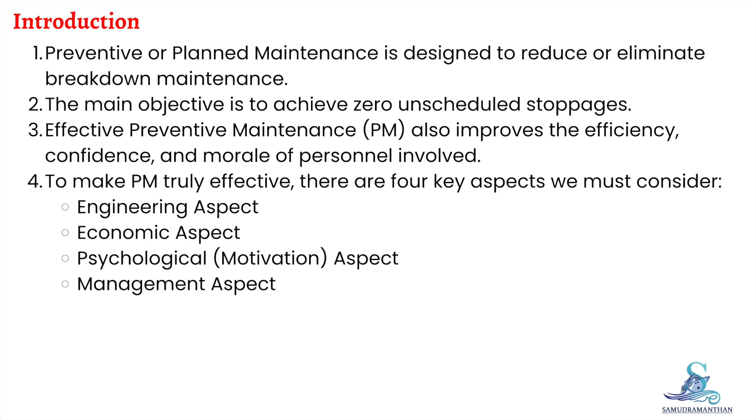To correctly implement and continuously improve preventive maintenance, often referred to as PM, there are four major aspects that must be considered. These are engineering, economic, psychological or motivational, and management. These aspects are essential if our aim is to have zero incidents and zero breakdowns. Let's understand each of these in detail.

The engineering aspect is all about performing the right task with the right technique at the right frequency and using the right tools. Here, the component and the system must always be viewed in totality, meaning we must see how each part interacts with the others. This holistic view helps in avoiding overlooked weak or vulnerable points in the system.

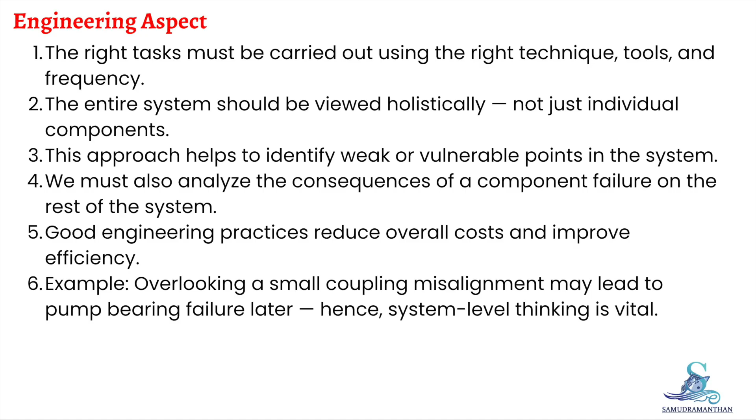It is also important to analyze the consequential effect of any component or system failure because one small defect can sometimes lead to a major breakdown. In short, good engineering practices always help reduce costs and lead to efficient performance of tasks, forming the technical backbone of a successful maintenance strategy.

The second one is the economic aspect. Here, we must understand that maintenance must always be worth the effort. Unless the issue is critical, such as one leading to downtime, environmental impact, or a safety concern, the procedures adopted should be economically justified. We must always compare the value of the potential failure with the cost of the maintenance effort. Spending more to maintain a system that is worthless is simply not practical.

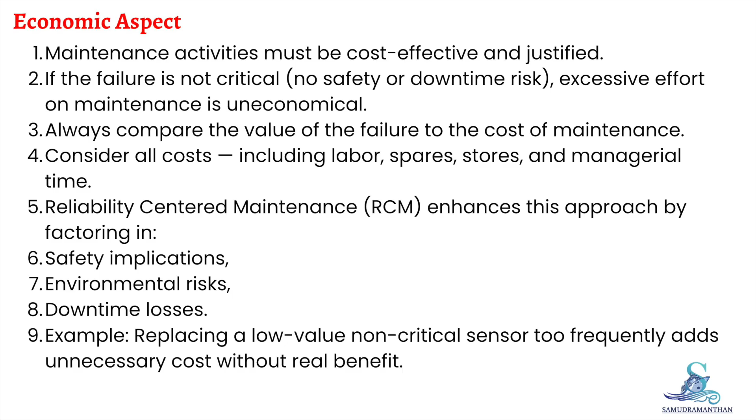Therefore, while calculating the cost of maintenance, we must include all related factors: executive time, labor cost, spares and stores, and other logistics. The concept of reliability centered maintenance or RCM adds greater depth to this economic approach as it incorporates safety, environmental impact, and downtime into the economic evaluation.

The third important aspect is the psychological or motivational aspect. The effectiveness of a planned or preventive maintenance system depends largely on the people involved: the seafarers, superintendents, and managers. All of them must be properly motivated so that the jobs are carried out as per plan and schedule. Personnel must be well trained and made aware of the importance of the PM system.

They should feel that they are an important part of the maintenance system, not just executing tasks mechanically. A sense of team spirit and ownership is crucial. When the personnel on board are fully aware of the system's goal and understand how the maintenance program benefits them and the vessel, they perform with more dedication.

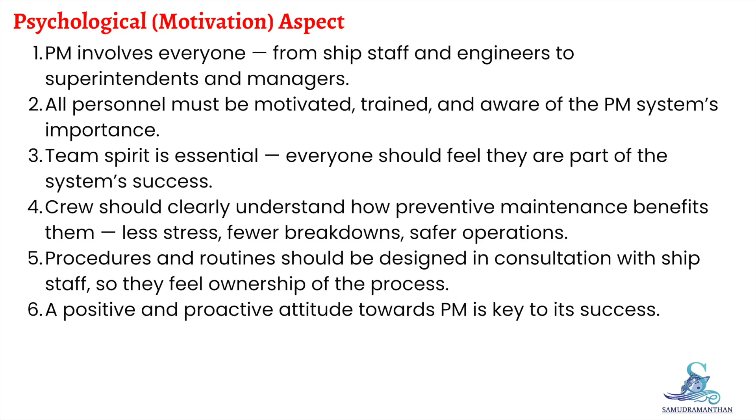It is also essential that routines and procedures are developed in consultation with shipboard personnel, ensuring their cooperation and creating a positive attitude towards the system.

The fourth aspect is the management aspect. A planned or preventive maintenance system must be constantly monitored by management to ensure quality and effectiveness. Maintenance quality is not the responsibility of an individual, it is a collective effort involving all connected personnel.

Managers must encourage a what-if attitude, asking questions like what if this fails, what can we do better. Such continuous evolution helps to improve the system over time. The mission for maintenance management should be to provide a reliable vessel by reducing unscheduled stoppages as much as possible and ultimately achieving zero unscheduled stoppages.

Additionally, the knowledge gained and lessons learned from the operation and maintenance process should be shared with designers and technical authorities so that future systems can be improved further. So far, we have discussed the four important aspects that make a preventive maintenance strategy effective: engineering, economic, motivational, and management.

Now, let us discuss the factors that actually support the implementation of preventive maintenance in practice. These are the actions and processes that make the PM strategy function smoothly on a day to day basis. The factors supporting a preventive maintenance strategy include task, inspection, TLC (tighten, lubricate, and clean), adjustment, planned component renewal (PCR), readings, discussion on board, and short repairs. Let's go through each of these in detail.

First, we have task. This involves preparing a list of all maintenance activities to be performed during an overhaul or scheduled maintenance period. These tasks would be based on experience, failure history, and manufacturer's recommendations. The purpose is to ensure that all necessary work is covered, both routine and improvement oriented, to benefit the system as a whole. The next factor is inspection.

Inspection plays a key role in preventive maintenance because it helps identify potential problems before they turn into failures. By simply looking, listening, and feeling, an experienced engineer can detect abnormalities. This can be further supported by condition monitoring instruments such as vibration detectors, thermometers, or pressure sensors, which help in diagnosing issues early. Regular inspection ensures that maintenance actions are based on actual condition rather than assumptions.

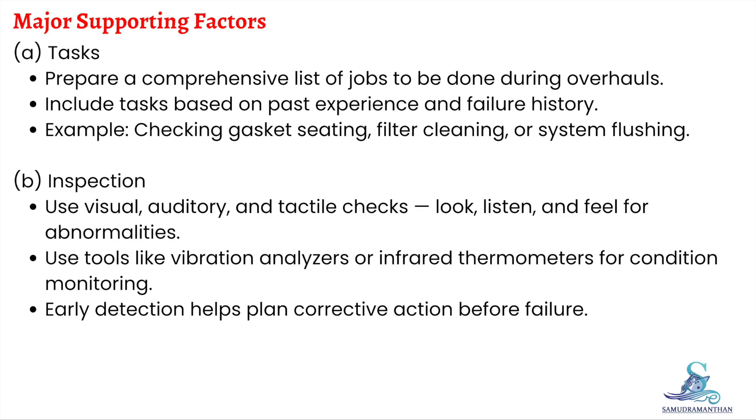The third factor is TLC: tighten, lubricate, and clean. This is perhaps the most fundamental preventive maintenance activity. By tightening loose parts, lubricating moving components, and cleaning equipment regularly, many potential problems can be eliminated even before they occur. TLC not only improves performance but also extends the working life of components. In short, regular TLC is a simple yet powerful tool for preventive maintenance.

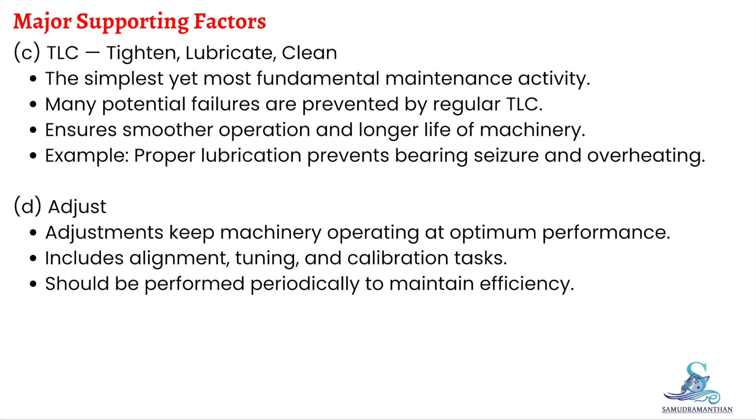Next comes adjustment. To keep equipment working optimally, regular tuning and adjustments are essential, whether it's setting clearances, alignment, or control parameters. A small adjustment can make a big difference in performance and reliability. Therefore, adjustments should be treated as a regular maintenance task, not just a corrective action.

The fifth factor is planned component renewal, or PCR. This involves the timely replacement of components before they fail. By studying the system and understanding which components are likely to wear out or fail, we can plan replacement in advance. This proactive approach helps in preventing unexpected failures, reduces downtime, and improves the overall reliability of the system.

Next, we have readings. Regular monitoring of operating parameters such as temperature, pressure, vibration, and consumption provides valuable insight into the equipment's condition. Any abnormal trend in these readings should be investigated promptly, and corrective actions should be initiated. Proper scrutiny of monitored data always allows early detection of deterioration and ensures timely maintenance intervention.

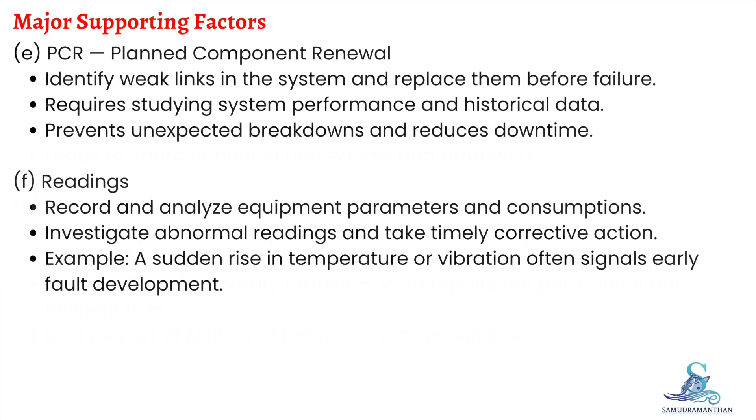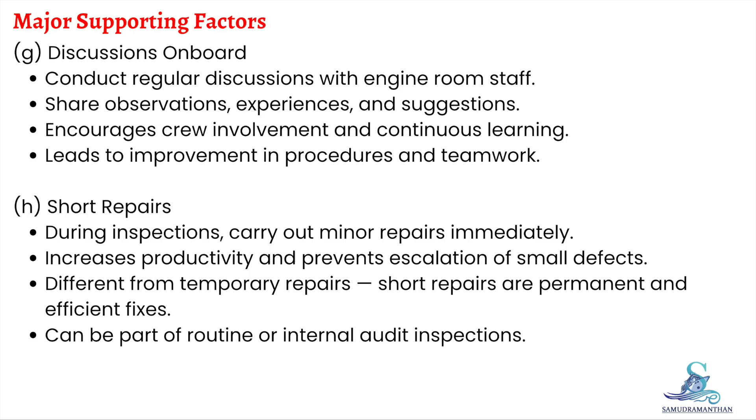The final factor is short repairs. While carrying out inspection, if small issues are noticed, they should be repaired immediately, not postponed. Short repairs are not temporary fixes but permanent small scale repairs that prevent larger failures later on. This improves efficiency, saves time, and increases productivity. Inspections may be routine or even part of internal audits, but performing short repairs during those times is a smart and effective practice. To summarize, the preventive maintenance strategy aims to reduce or eliminate breakdowns and achieve zero unscheduled stoppages.

To make it effective, we must focus on four key aspects: engineering, economic, motivation, and management. And to support it, we rely on practical activities: task, inspection, TLC, adjustments, planned component renewal, readings, discussions, and short repairs. Together these ensure a strong, reliable, and efficient maintenance system.

In conclusion, preventive maintenance is not just a routine, it's a complete philosophy that combines engineering accuracy, economic judgment, human motivation, and managerial control. When all these aspects work together, we can truly achieve our goal of zero incidents and zero breakdowns. Thank you for listening.

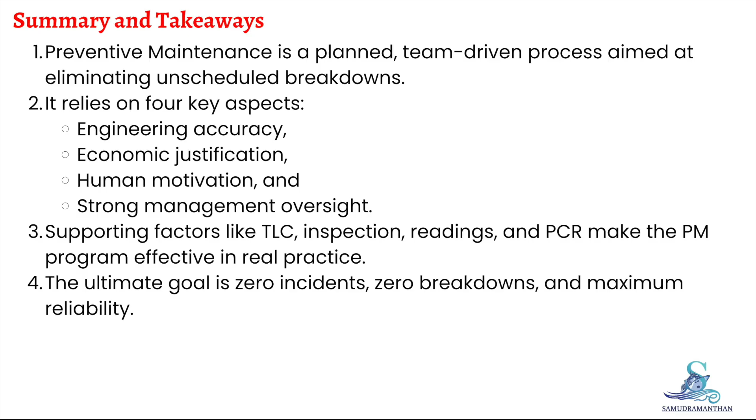In this media, you are going to learn about the important aspects of planned or preventive maintenance strategy.

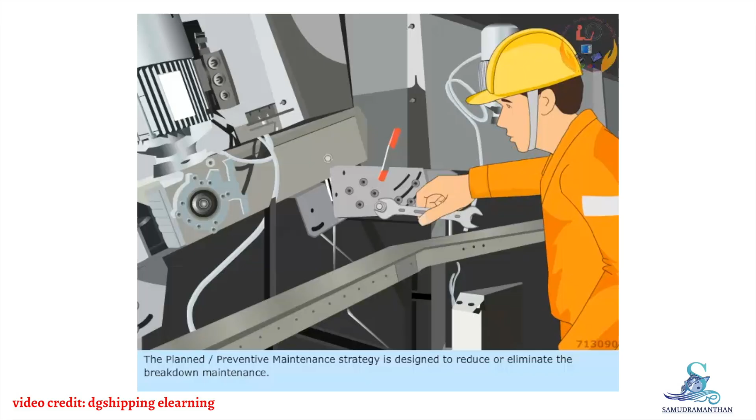The planned or preventive maintenance strategy is designed to reduce or eliminate breakdown maintenance. By analyzing the strategy and corrective maintenance, performance can be improved in achieving the goal of nil unscheduled stoppages.

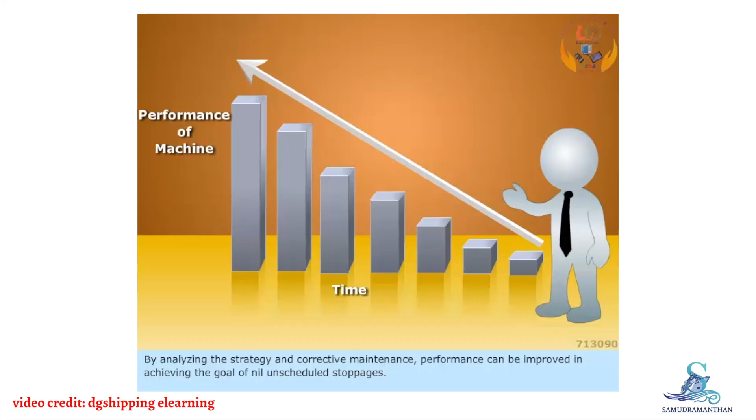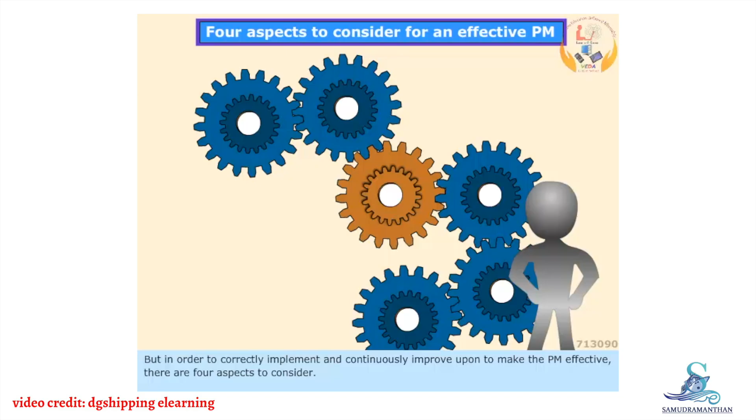But in order to correctly implement and continuously improve upon to make the PM effective, there are four aspects to consider. They are engineering, economic, psychological, and management.

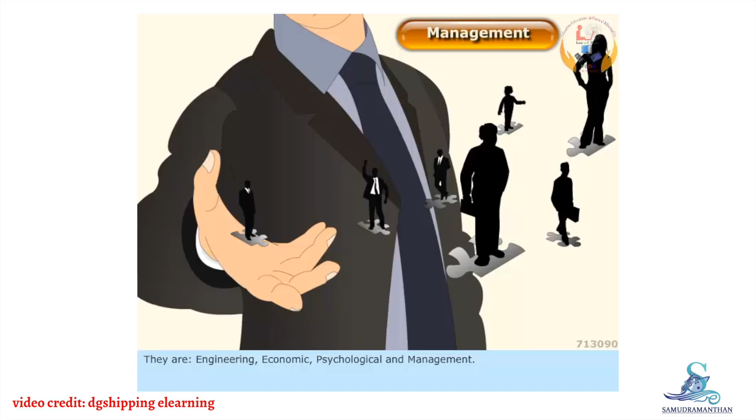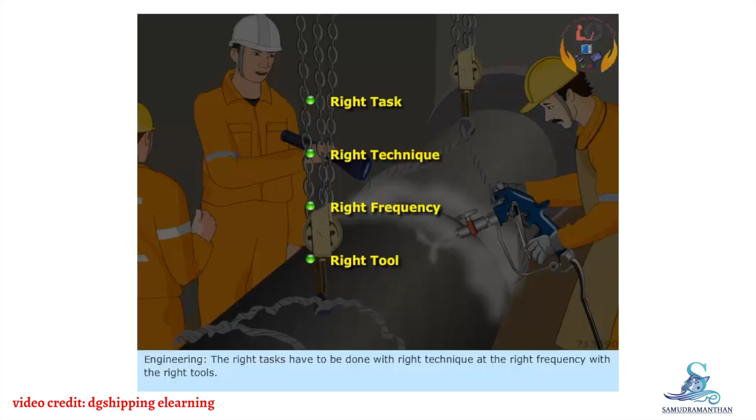Engineering: the right tasks have to be done with the right technique at the right frequency with the right tools. Good engineering always helps to reduce cost and leads to efficient performance of tasks.

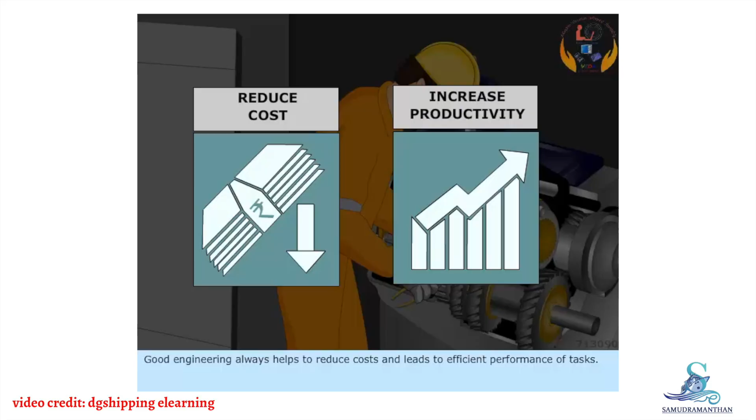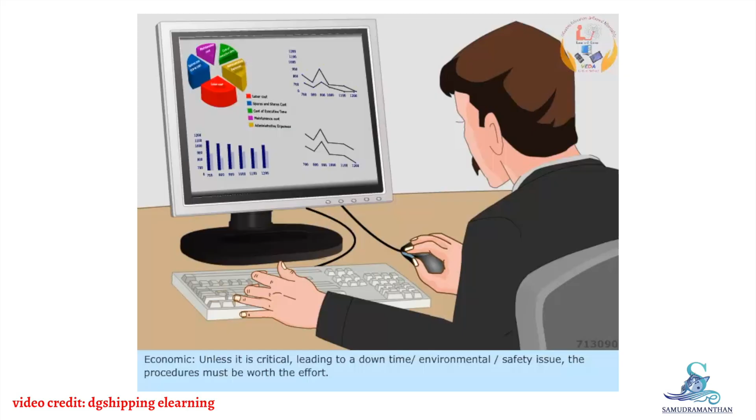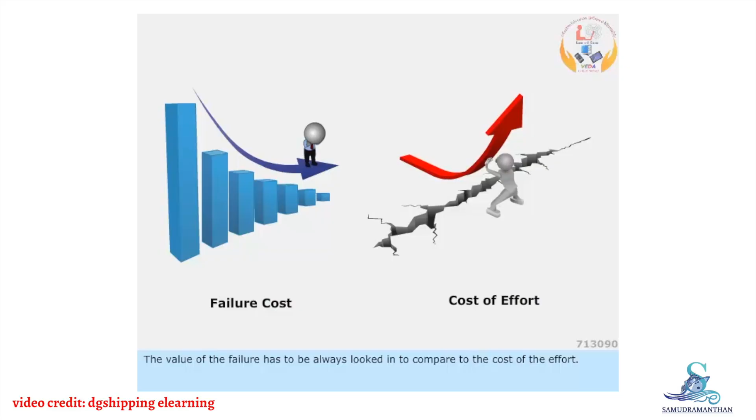Economic: unless it is critical, leading to a downtime, environmental, or safety issue, the procedures must be worth the effort. The value of the failure has to always be looked into compared to the cost of the effort. When calculating the cost of the effort, it should also include the cost of executive time, labor cost, spares and stores cost, etc.

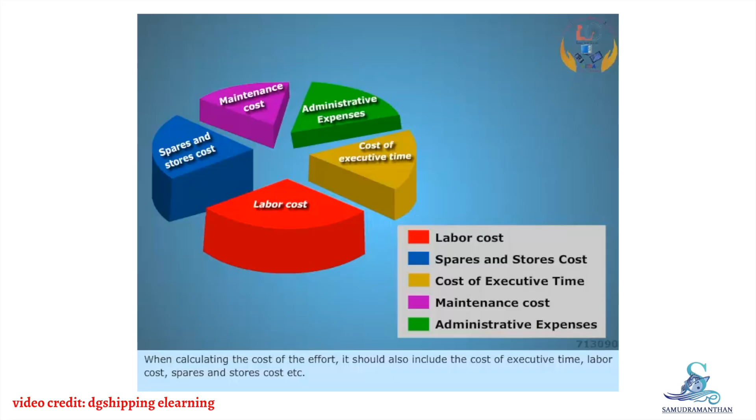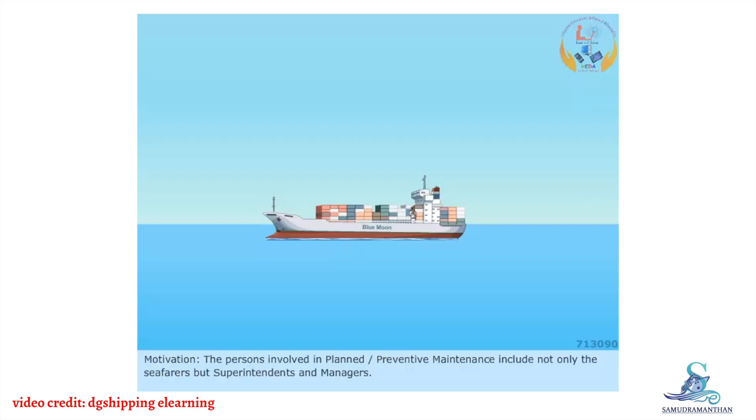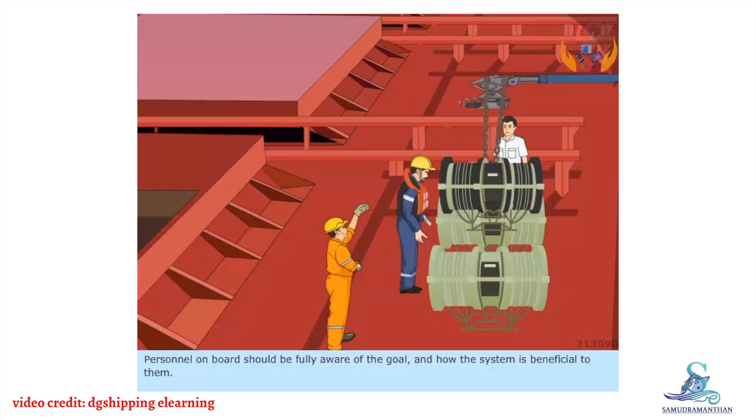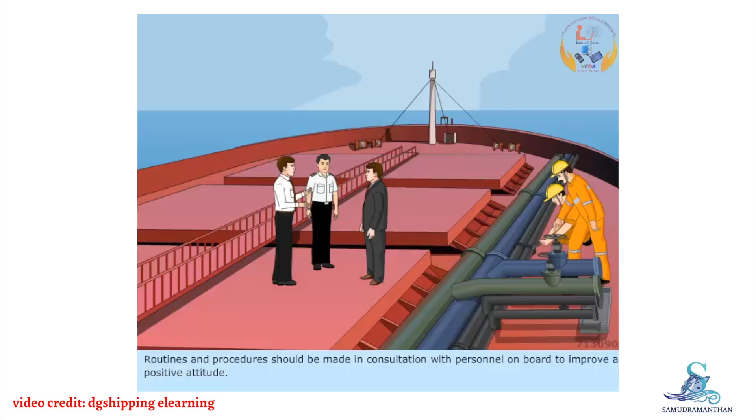Motivation: the persons involved in planned or preventive maintenance include not only the seafarers but superintendents and managers. Everyone has to be motivated and trained so that the jobs are carried out as planned. Personnel on board should be fully aware of the goal and how the system is beneficial to them. Routines and procedures should be made in consultation with personnel on board to improve a positive attitude.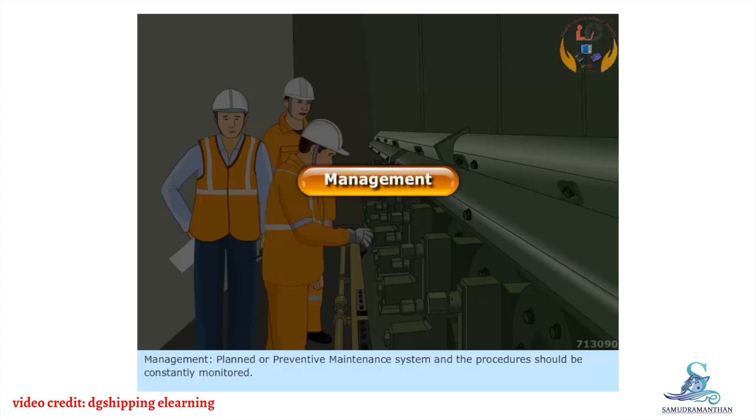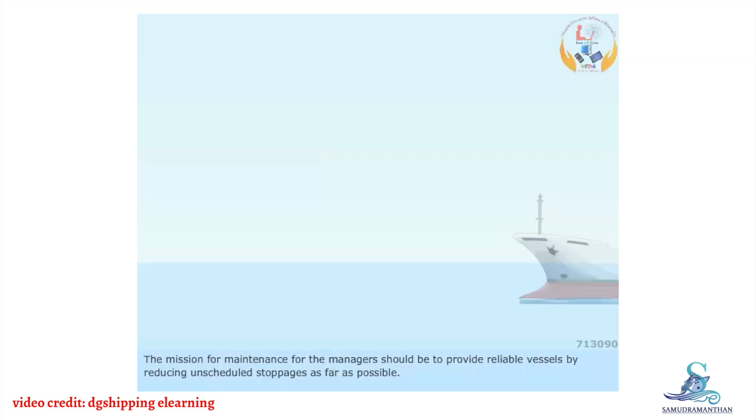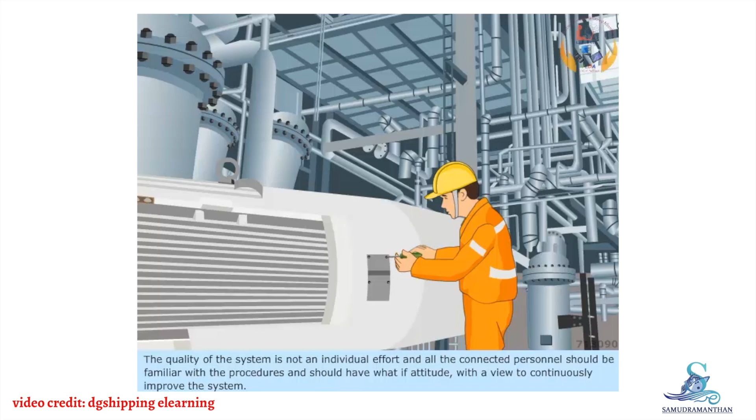Management: planned or preventive maintenance system and the procedures should be constantly monitored. The mission for maintenance for the managers should be to provide reliable vessels by reducing unscheduled stoppages as far as possible. The quality of the system is not an individual effort, and all the connected personnel should be familiar with the procedures and should have a what-if attitude with a view to continuously improve the system.

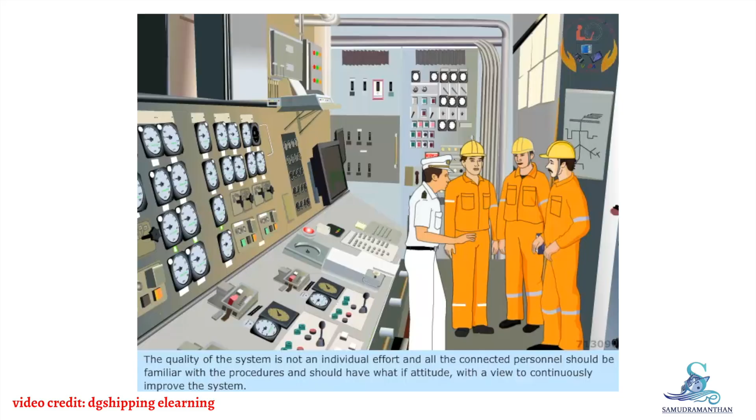Thus, you have learned about the important aspects of planned or preventive maintenance strategy.

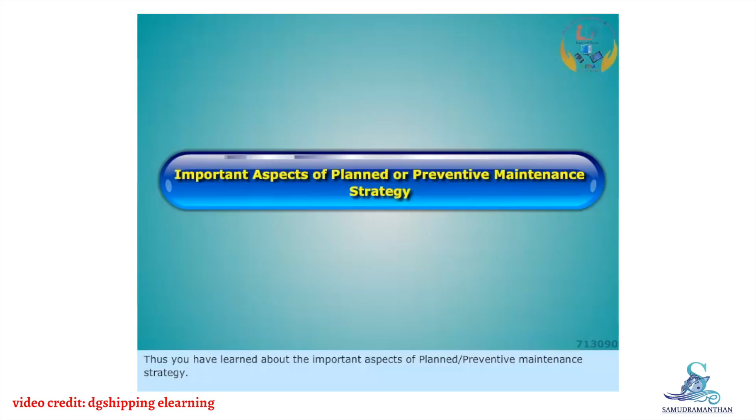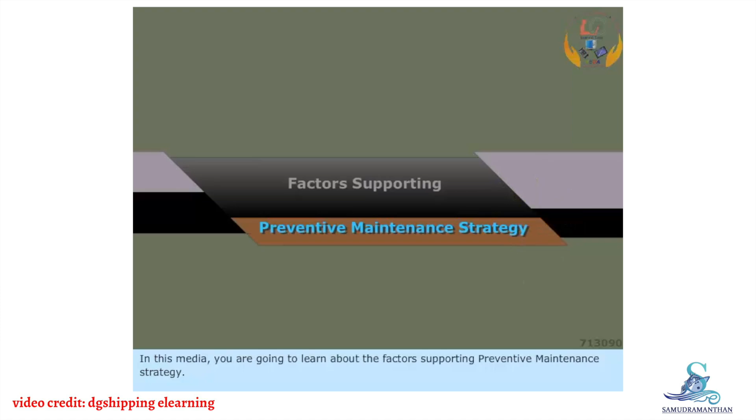In this media, you are going to learn about the factors supporting preventive maintenance strategy. Various factors that support the preventive maintenance strategy are...

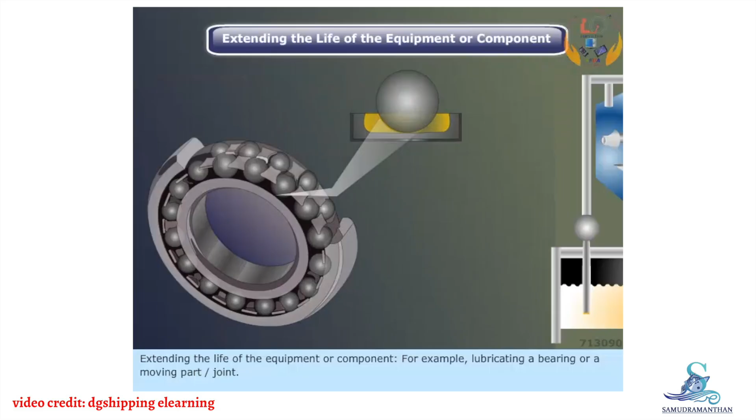Extending the life of the equipment or component. For example, lubricating a bearing or a moving part or joint.

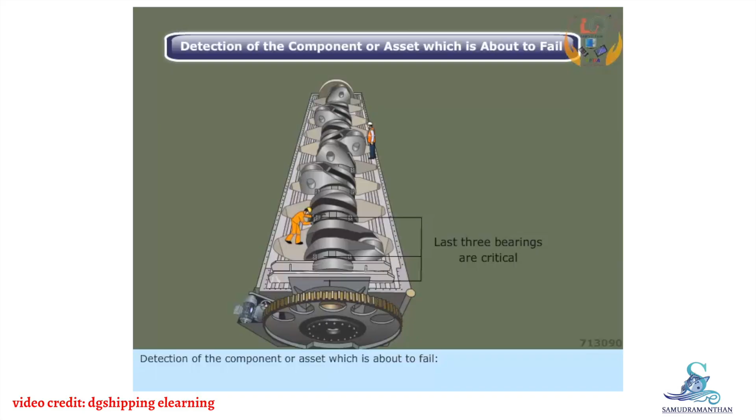Detection of the component or asset which is about to fail.

Task: a list of all tasks to be performed during an overhaul and any other work which will benefit the system as a whole, either based on experience or on the history of failures.

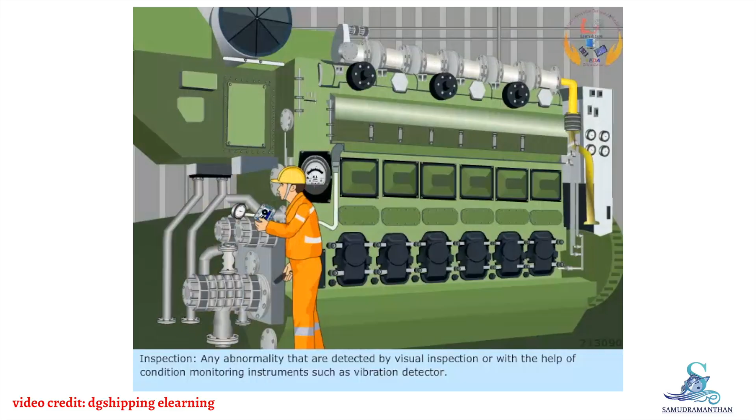Inspection: any abnormalities that are detected by visual inspection or with the help of condition monitoring instruments such as a vibration detector.

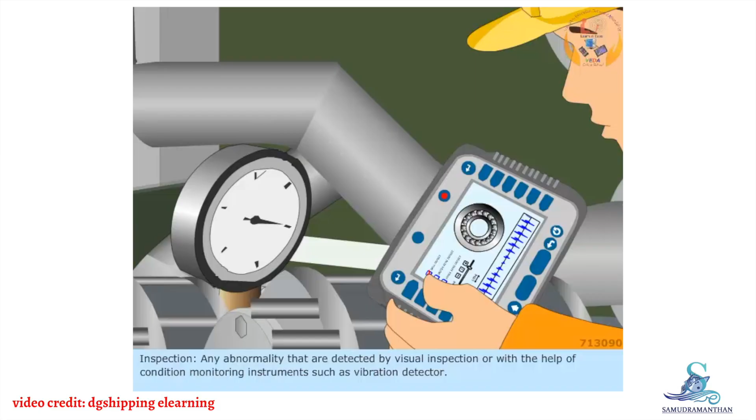TLC: this is the most fundamental thing that extends the working life of the component by tightening, lubricating, and cleaning procedures.

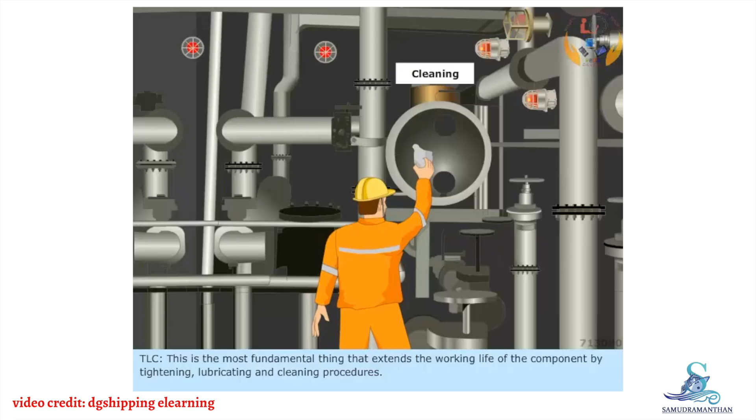Adjustments: in order to make sure that the equipment or component works optimally, tuning or adjustments should be done as a regular task.

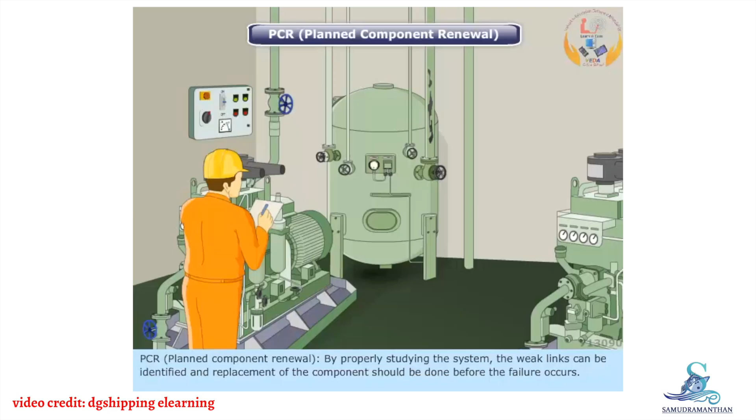PCR, planned component renewal. By properly studying the system, the weak links can be identified and replacement of the component should be done before the failure occurs.

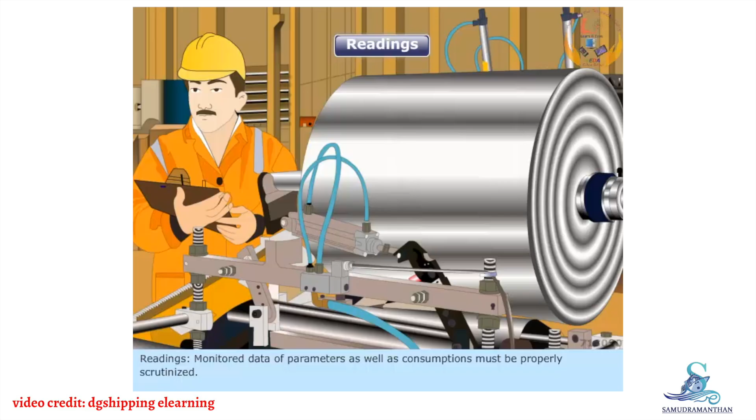Readings: monitored data of parameters as well as consumptions must be properly scrutinized. Also, abnormalities should be investigated and corrective action should be initiated as soon as possible.

Discussions on board: listen and discuss with the ship staff about the mode of maintenance being done and correct where necessary.

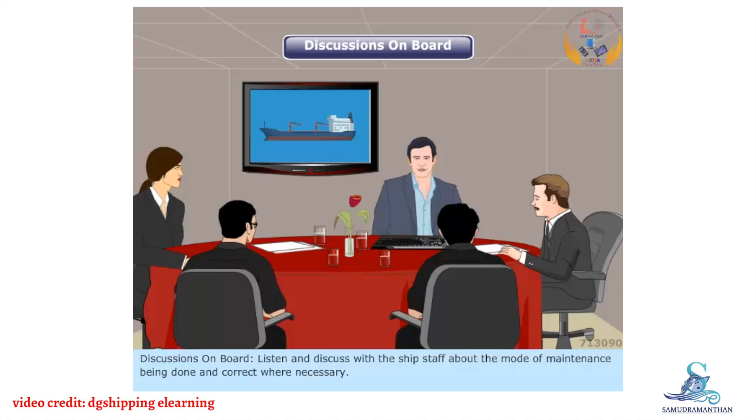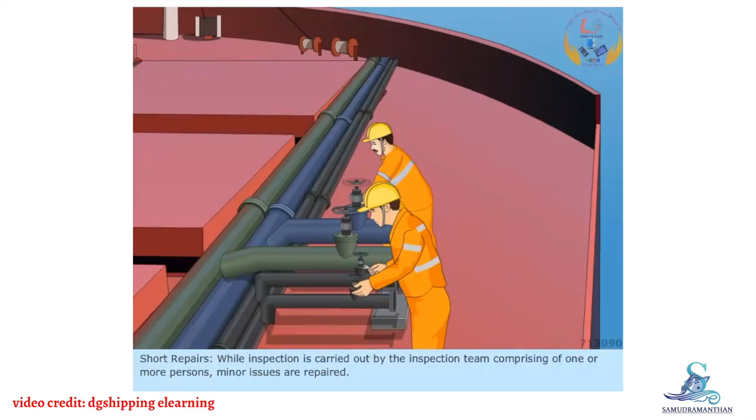Short repairs: while inspection is carried out by the inspection team comprising of one or more persons, minor issues are repaired. This improves efficiency as well as productivity, and it is different from temporary repairs.

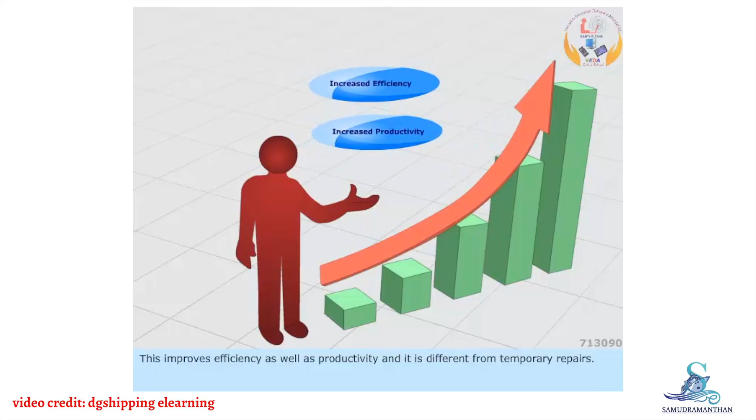Thus, you have learned about the factors supporting preventive maintenance strategy.